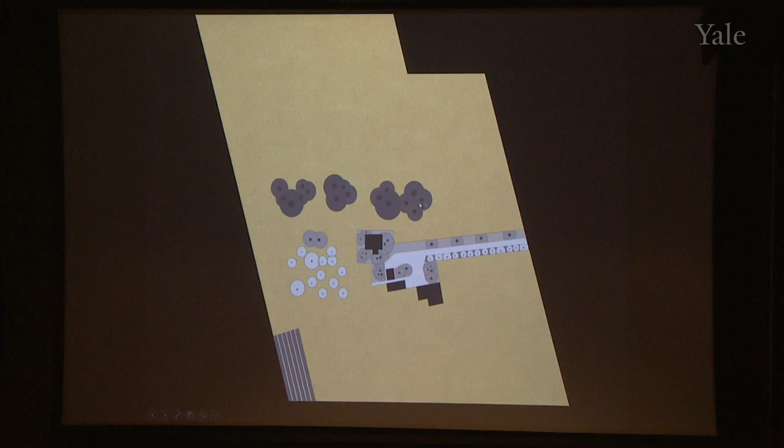Okay, these are fully mature Douglas fir trees, which are a residual part of the evergreen forest that used to cover the island. Below, there is a cottage, barn, a few outbuildings, including a studio, and a cultural landscape, which has been constructed by a German resident who subsequently sold the property to my clients, which is characterized by fruit trees, by trees imported from Europe, by a very eclectic cultural landscape.

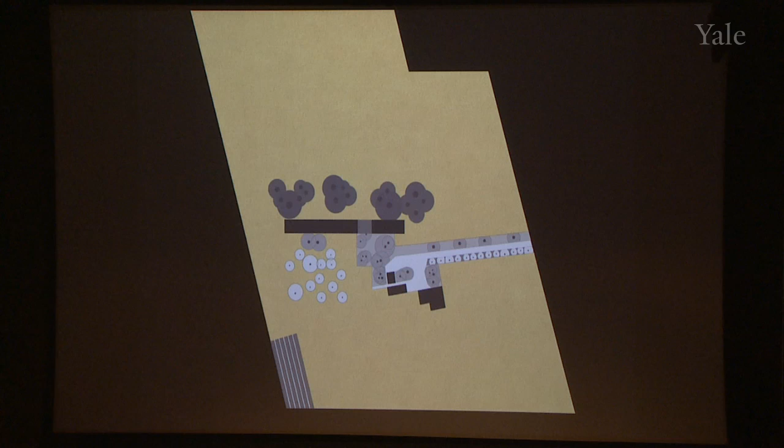So our approach was to try and find some way of organizing this larger site and introducing a larger new house to the project. And we did that by, first of all, taking the existing house and selling it to the neighbor up the road and just moved it down the road, and then inserted the new house, which is comprised of 2 parts, a main house and a guest house, and it has a very unusual proportion. It's 280 feet long, and the interior dimension is 16 feet. So the aspect ratio of this house is extreme.

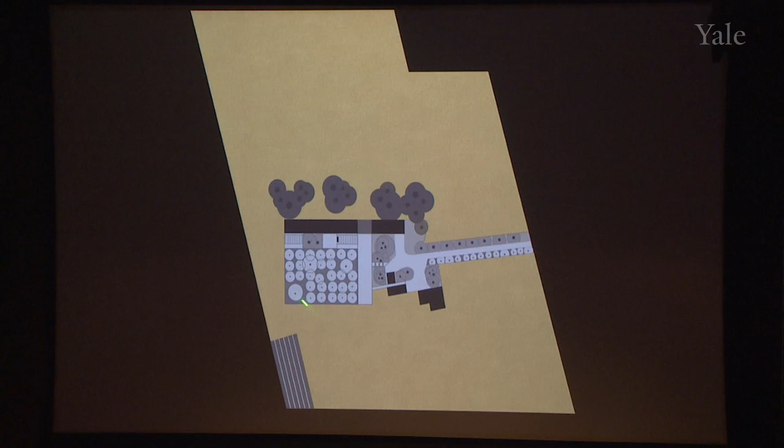And then finally, we reinforced the cultural landscape by developing the orchard in a much more intensive way. The clients were very food-oriented and very garden-oriented, and so there was this significant program of reinforcing the cultural program. Here you see the plan in various forms, the roof plan, the reflected ceiling plan, and the floor plan. And a couple of things that jump out. One is obviously the aspect ratio, this extremely elongated plan where the rooms are simply lined up as a series of rooms.

But if you look at the roof plan, you can see that there are 40 skylights in the roof. And the majority of these skylights do not penetrate into the interior. They simply illuminate the building envelope, the roof assembly of this house. And I'll explain briefly why that is so. And then there are very significant apertures which are completely opening. So this is an aperture that's 78 feet clear span, which is fully retractable. The climate here is extremely benign. During the summertime, the temperatures run in the mid to high 70s all the time. There's virtually no rain. And so the house opens up like a pavilion.

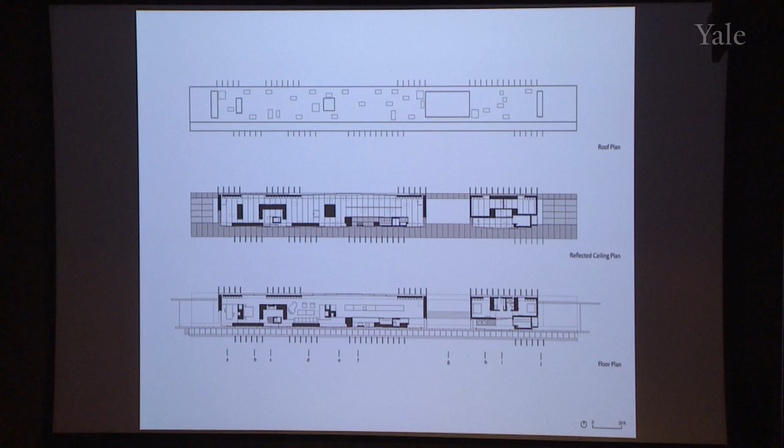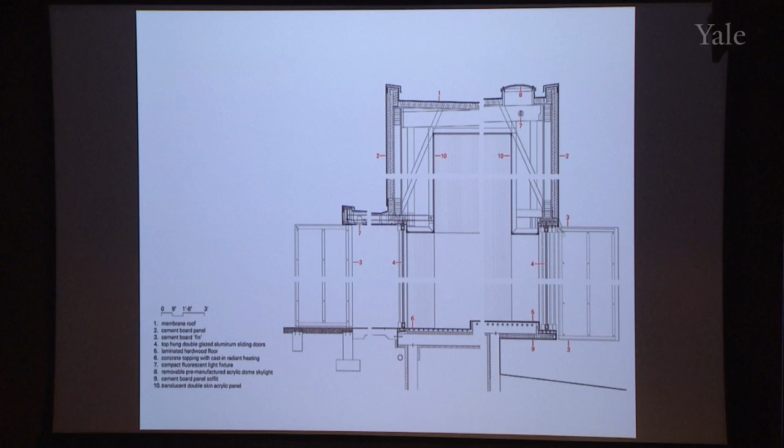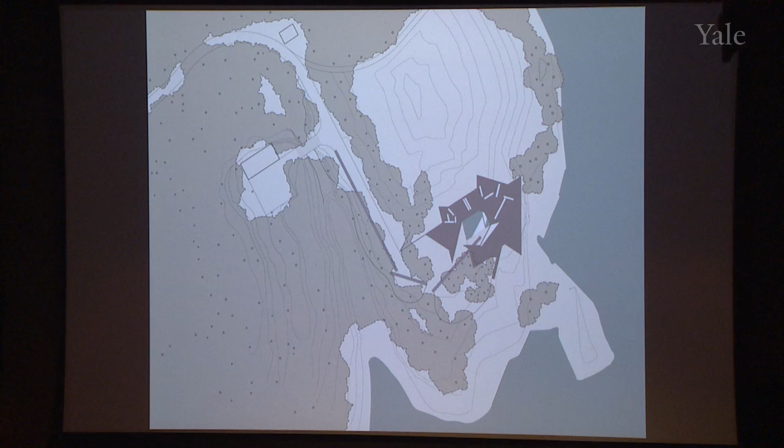And so the spatial idea of the house begins with the mound and the forest and the panorama to the east. Entering the site from deep inland, you move along the edge of the rock outcropping and through a series of spaces which are defined by low rock walls. And then there is inserted a series of concrete walls which channel the space through what will be the house and out to the ocean.

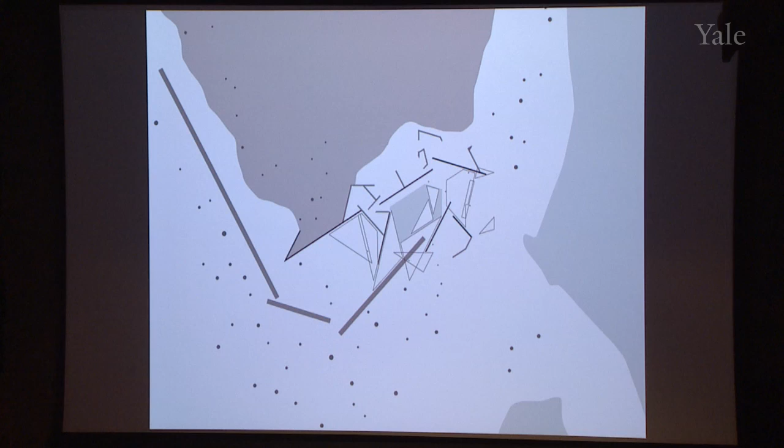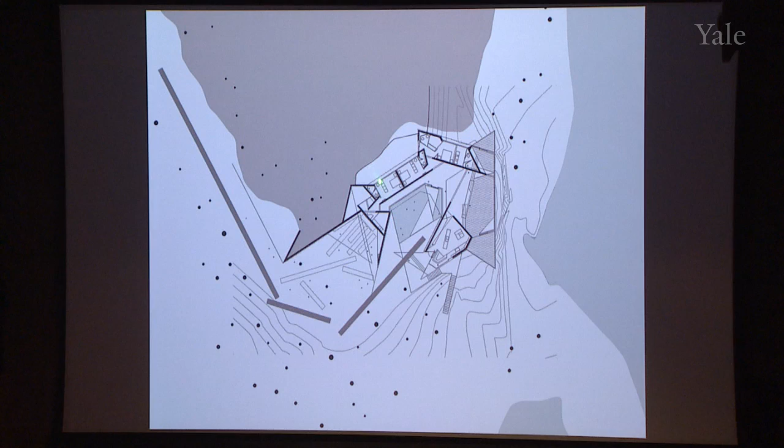Various eddy-like spaces which are around the main flow space become the service spaces, bedrooms and kitchen and things of that nature. That center space gets filled with debris, like the debris on the beach below, shards of concrete, patches of water, elements of furniture. And finally, a deck which is cantilevered off the rock cliff beyond the face of the rock toward the ocean, and the plan itself. And so the private rooms are all located around this central space which flows through.

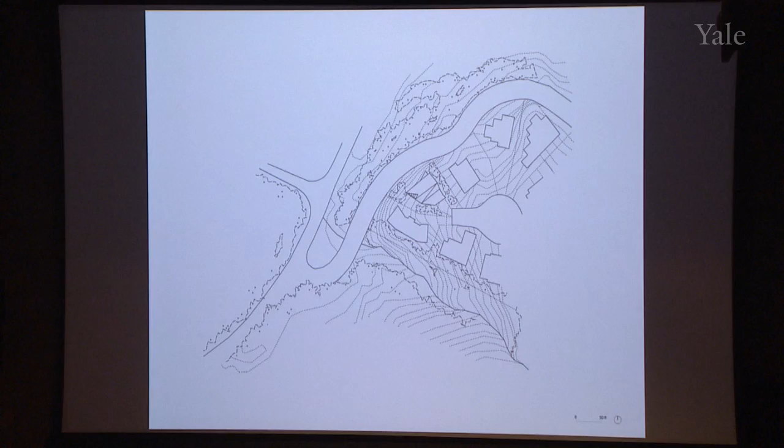Very tough context for us by virtue of the character of the adjacent dwellings, but also by virtue of the real estate imperative of Whistler, which is that land prices are very high, and the owner wanted to maximize the development. And so our instruction was very simple. He wanted the biggest house that was legally possible to achieve on the property.

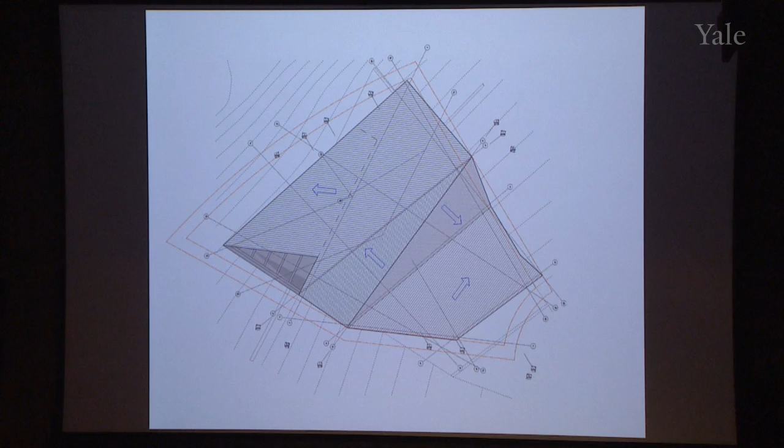That posed the obvious issues of fitting it into the building envelope, but more challenging in Whistler is the need to design a house which sheds snow into locations where people and cars are not located. And so the roof is designed in a way to push snow around so that it doesn't go into the areas where people and their vehicles are.

This was, from a design point of view, a new investigation for us. It was the completely three-dimensional project. The second house I showed you on Quadra Island has a very complex plan geometry, but beyond that, it's fairly conventional. This house was developed to maximize volume. We designed it entirely in small card models.

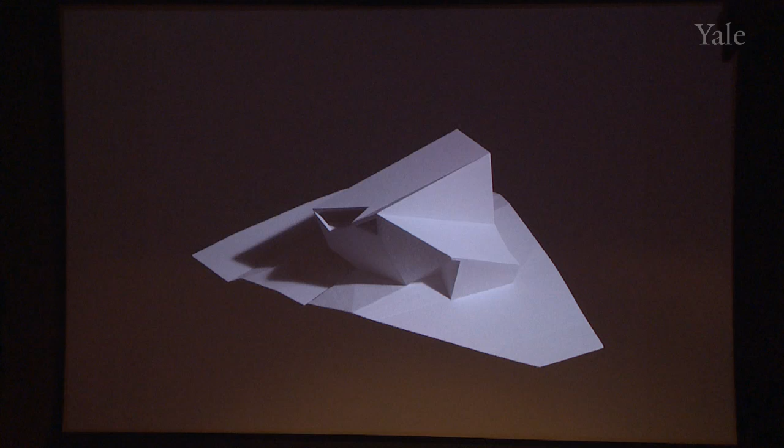And once we were satisfied that it was a good match, we proceeded with that. And so this is the final digital model of the project. Except for some interior walls, there are no vertical walls in the project. And aside from the floors, and even some of them are sloping, there are no horizontal surfaces in the project. And so framing this project and documenting it became a significant challenge.

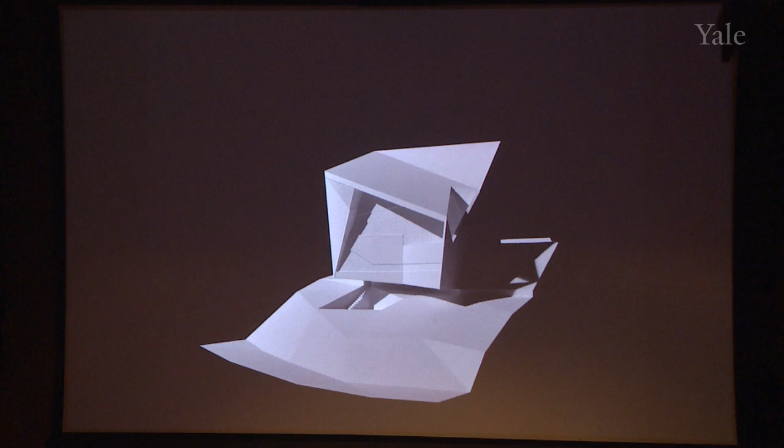It was only possible because of our ability to work in 3D and the ability of certain trades to construct in 3D. And in that regard, the house was framed in terms of its principal members with steel and heavy timber construction, both of which industries are probably the most developed in terms of three-dimensional geometry. And so they were able to sort of stitch out the basic configuration of the house within which there was a wood structure infill.

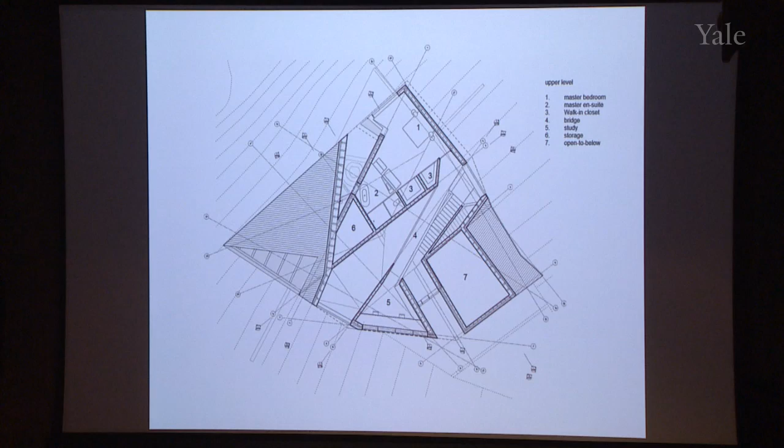We made a few mistakes where we felt that we didn't need heavy timber or steel. We framed those areas in conventional wood framing, and getting those geometries right was almost impossible. The contractor really struggled. We came to understand that it would have been a much better investment to do the entire project as a steel or combination steel and glulam frame to simplify the construction process.

And so the house is constructed with a concrete box which allows a significant cantilever out over the slope because it's on a steeply sloping site, above which there is a frame which creates the upper structure with a wood infill, and within the middle of which is a tall roof space which runs through the project to bring light into the center of the project.

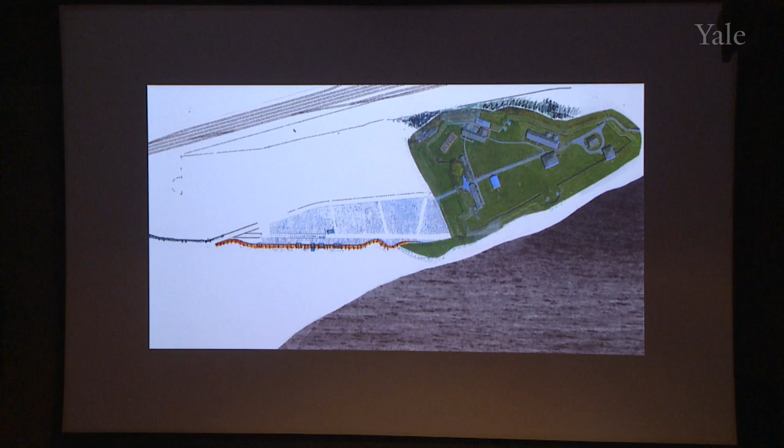And so here is our site, not the most auspicious of sites. And this is the beginning of one of the sketches from the competition, the idea of a barricade, a long palisade of weathering steel panels behind which and below grade, below the common above, the visitor center would be located. And so the plan is, this is the pathway of the freeway, which is running through here. The building is located in the zone between the freeway and the undisturbed soil above.

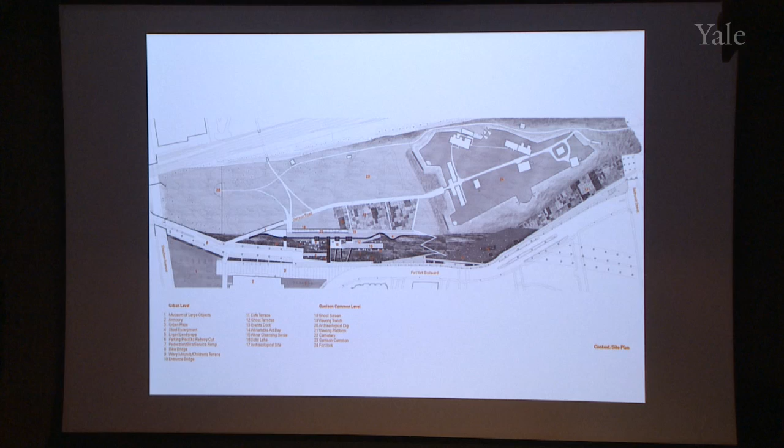The undisturbed soil above is an archaeological site which is being worked. And the only place in which we could locate the building without interfering with the archaeological site was in the spoil of the freeway construction. So basically that part of the site that was disturbed by the construction of the freeway is where we located the building. The building, as I said, is basically subterranean, located below the common. So this is the battlefield here. This is the freeway. This is the extension of the common with our weathering steel wall.

And then the space below the freeway is part of a very important series of spaces in Toronto right now, which is the subject of a great deal of discussion because this freeway cuts off the lakeshore from the city and has significant spaces under it. And so one of the important things that the project began to address is how to occupy this space and turn it into a positive public space.

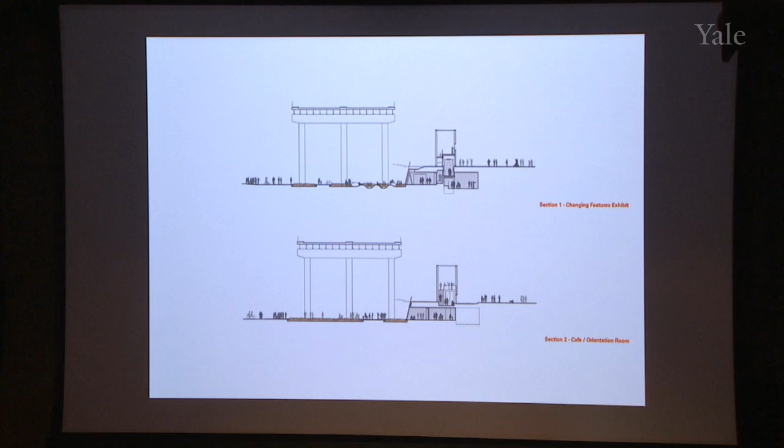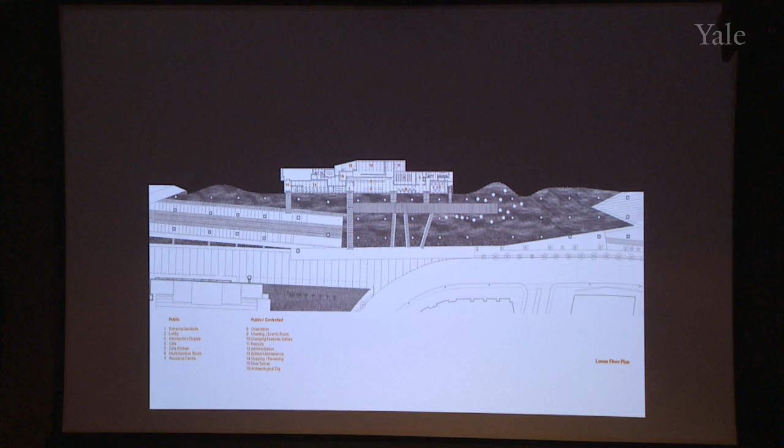The plan, which I won't go into in detail, has a major lobby. It has a variety of multi-purpose rooms. Not only is it a visitor center for the fort, it is also a community center for the local population. And so it has a lot of multi-purpose uses. But there is also an important exhibit space, to extreme gallery standards, which is located here, and an administration area for the operation of the fort.

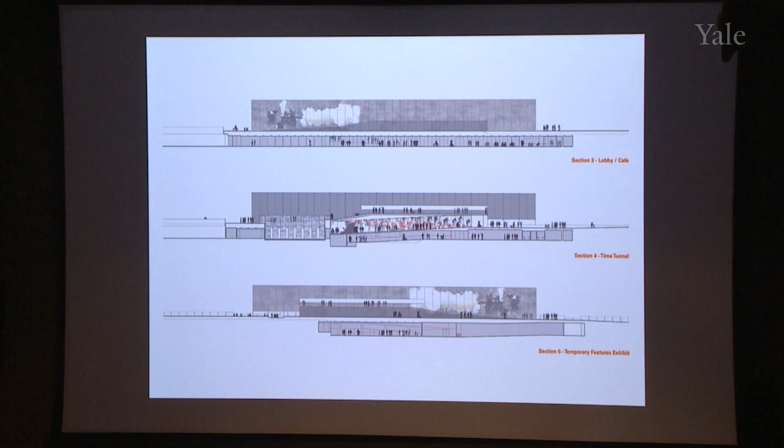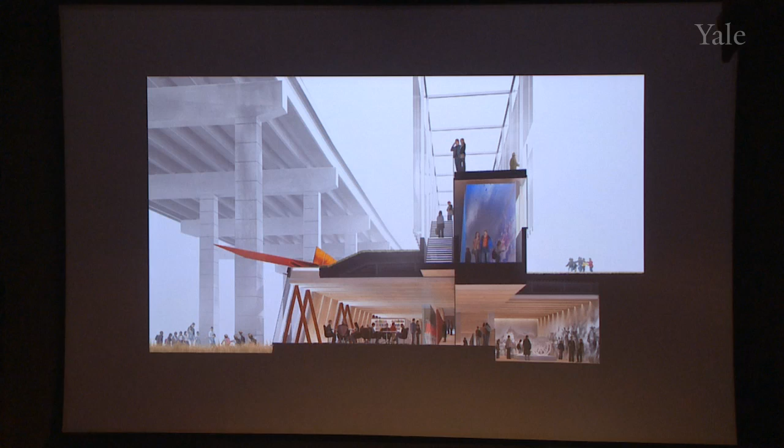One of the interesting things about the brief of the competition was that there was to be what was described as a time tunnel, which would lead you from the visitor center to the fort. And in our project, we proposed to develop a ramp that would run through an audiovisual experience and take you from the lower level within the visitor center up to the upper level of the common, which you see here. So taking you up and out to the upper level, again in section here.

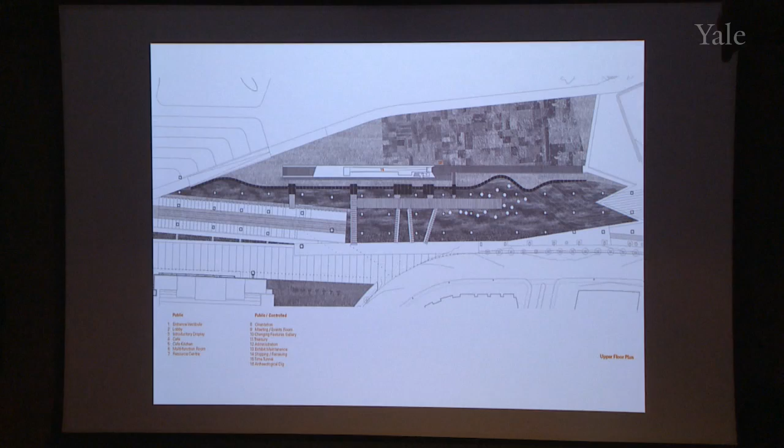What we found was that there was another possibility, which was that this would become a scrim onto which audiovisual could be projected to represent events of the history of the fort, but also to support other public events. Well, we won the competition. Actually, this is the plan leading you up and back to the fort. And the project was delayed for a while, and then ultimately we began to develop it.

year. The scrim and projection is a victim of the budget struggles that we had on the project, and even the fact that the project is currently incomplete in terms of the landscape and the interior development is a function of some of the budget struggles we had. But Toronto was blessed by the presence of Rob Ford as mayor, and this project was developed entirely during his tenure. And so it was an interesting experience.

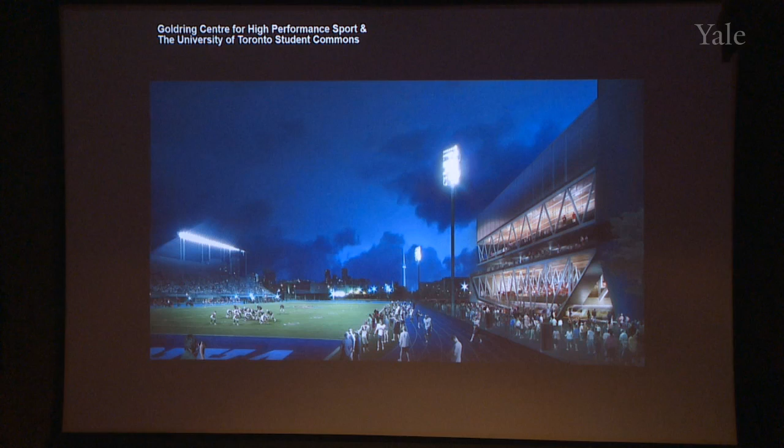There would be a large basketball, volleyball field house, which would have 2 courts, one of which is a competition court and practice court, the other strictly a practice court. This would be an extending stands, which would cover the practice court during events, and so there would be seating on both sides of this court, and there would be a clear span over this entire area. The university also wanted to put a tower on top of the field house.

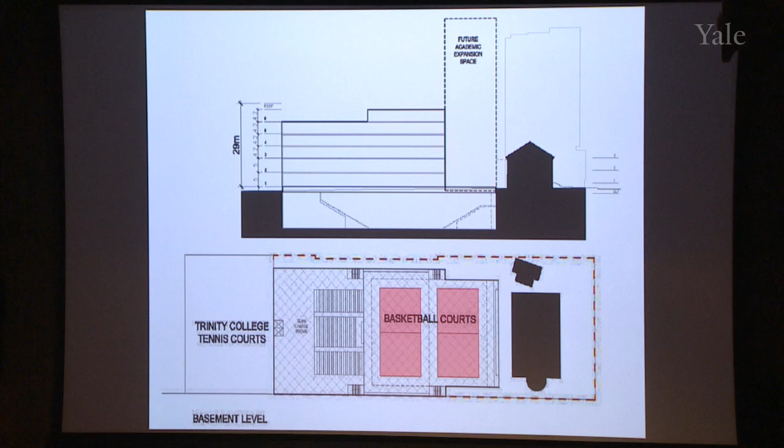And in our proposal, we decided that that was a structurally ambitious thing that we could avoid. And we decided to avoid it by organizing the field house differently. We decided that we would use modern technology in the form of LED game lines to reorganize the court in such a way that you could have both the competition court and the two practice courts within the same space and avoid the need to project beyond the site of the project to below the tower. And then above that, we located the student center, the strength and conditioning center, and then a small research hub above that.

As I said, the competition court looks like this with seating all around, and it's very interesting because we did this. Ultimately, we were selected for the project, even though it was in violation of the rules of the project, which is the perversity of competitions. More likely than not, the winner has broken a rule, an important rule somewhere.

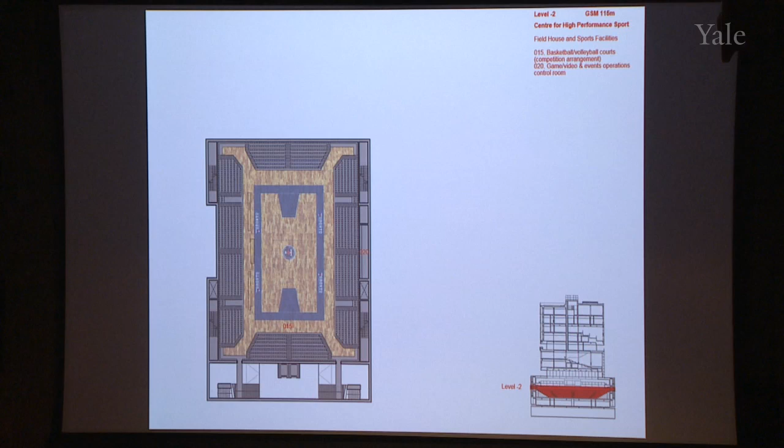So the notion is that you would enter the sports facilities from a lobby on the south and the student center from a lobby on the north. This is the 360 seating, which proved to be instrumental in the organization and selection of our project.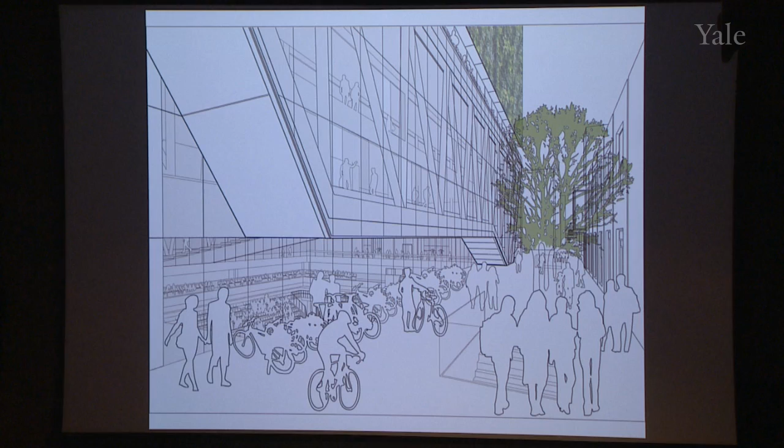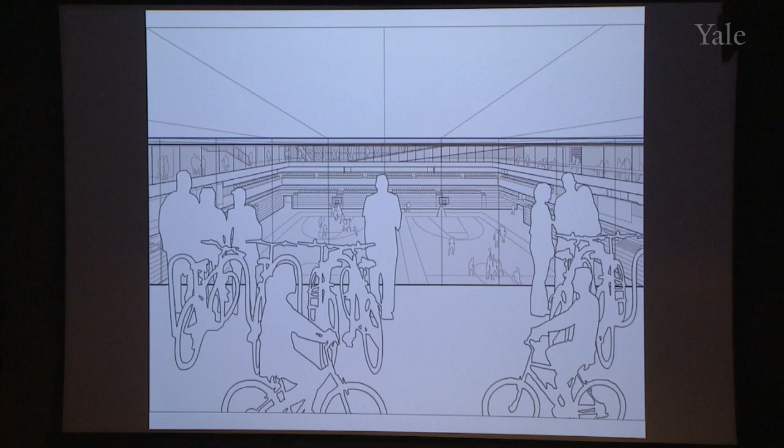Not only that, unlike the university brief, we raised the gymnasium so that there is clerestory lighting all the way around, which can be blacked out, but which allows you, from the student lane and from the street and from the two lobbies on either end, to overlook the basketball court. And it's really quite amazing. The lane is only about 20 feet wide, and you look into this enormous space. It's a real inversion of expectation.

And so going to the student center, moving up on the north lobby to the student center, interestingly enough, the students who were not really part of the selection process or part of the mandate for this project ultimately decided that they didn't want to be part of the project. And so when we moved forward, and this is the Strength and Conditioning Center, again, overlooking the field. When we moved forward, they said there's no way they wanted to be in a multi-purpose university building, because inevitably the university would take over their space, and they wanted to be in a standalone.

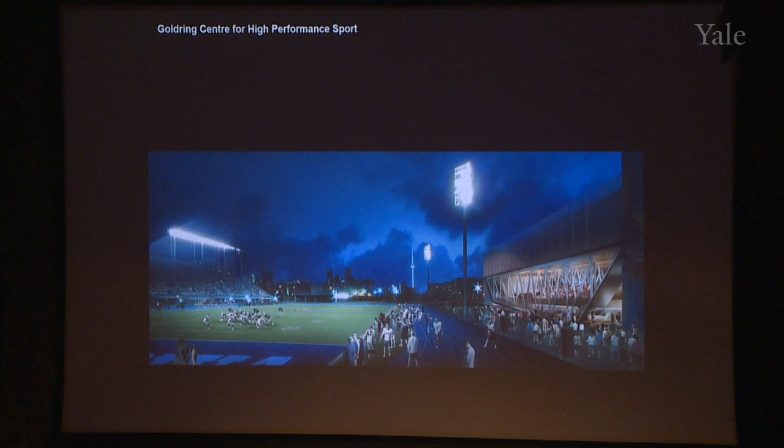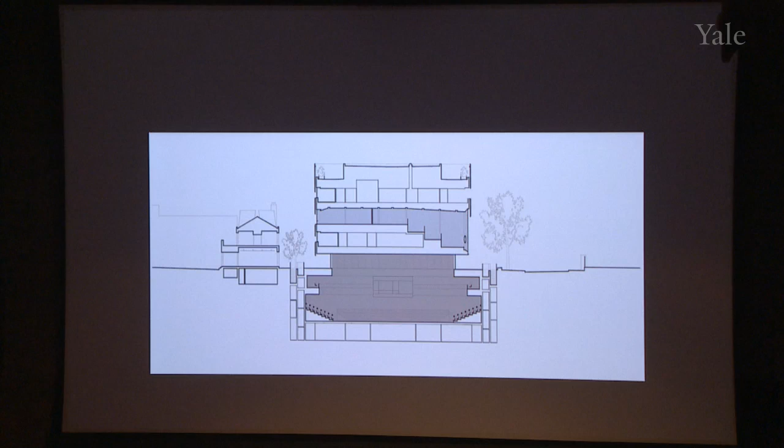And as a result of some significant budget issues, we removed that part of the project. We really consolidated the research into a single floor, and so we were able to get a much more compact and much more cost-effective structure, which allowed us to move forward with the project, except for the wrinkle that the tower, which was supposed to be here, which we had so carefully avoided, was compromised by the redevelopment of a historical building at this point for a very important donor for the university.

To make this building work, like Rudolph Hall, they needed to add exit, access, and mechanical to the building, which they decided to do in this location, overlapping the footprint of the proposed tower. The argument that they made was that these components could be treated as temporary, and that at some future date when the tower went forward, they can be removed. How you remove the elevator system, the mechanical system, and the safety exiting from a building was something that was not discussed and obviously not practical.

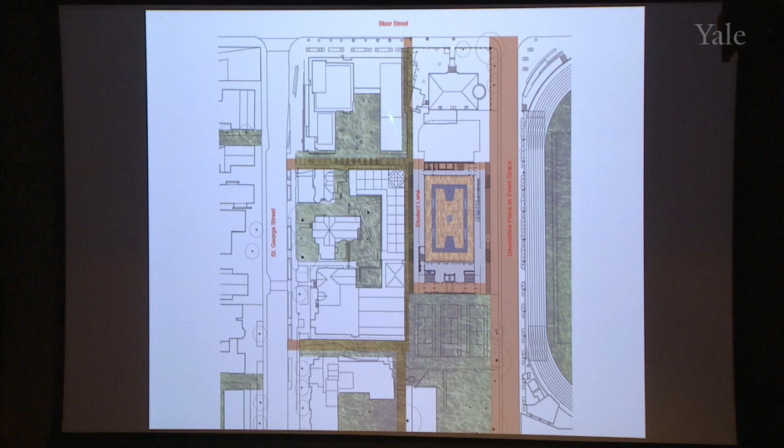And so we were then charged with how do you now solve the problem of the tower? And not only that, the tower was held away so that trucks could get in here to provide service to these four buildings. And there was only one solution possible, which was to construct a turntable, and trucks drive in and they get turned around to deal with all the servicing from these various buildings. And not only that, this turntable structure had to be designed in such a way that it could support a tower of some undescribed

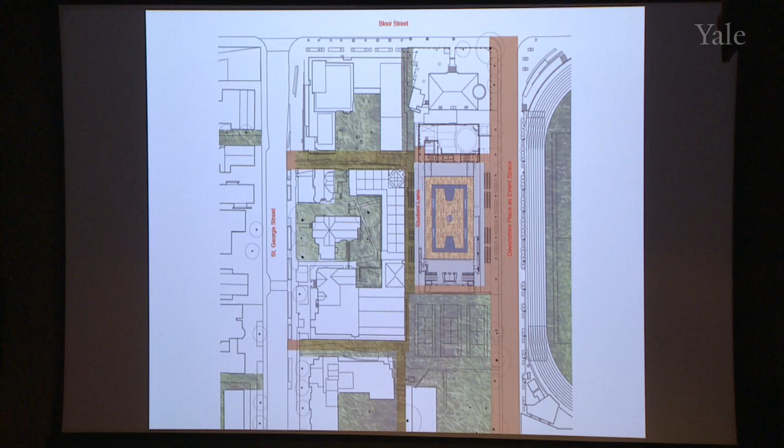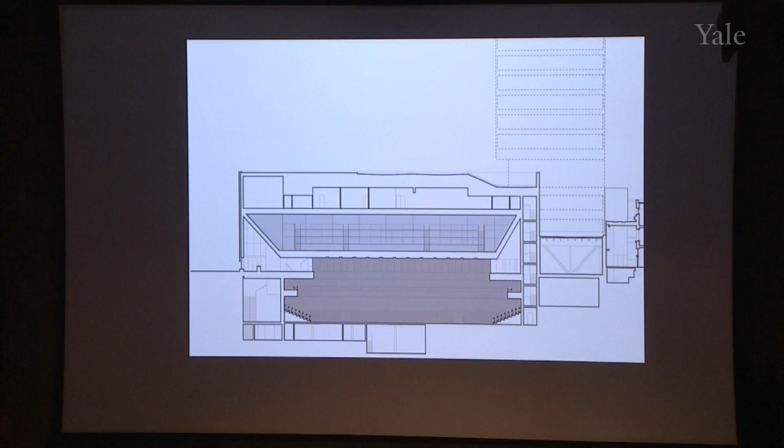future character. And so the building that we were asked to design now had a little doghouse on the back of it, which had to set itself up to support a future tower. And not only that, the future tower sat on part of the large span trusses for the field house. And so here is the project under construction.

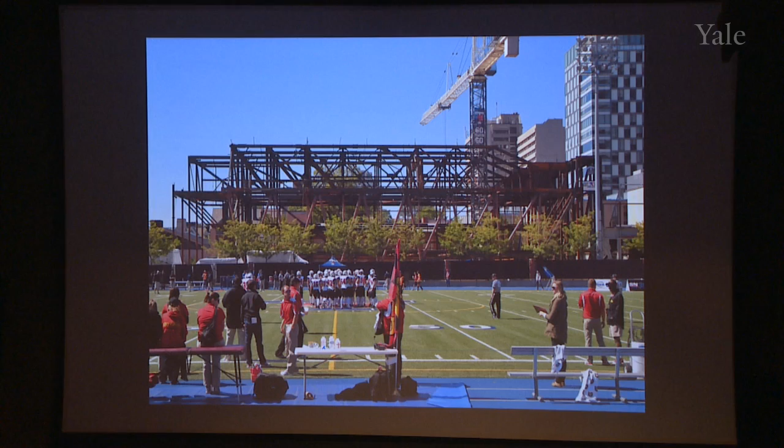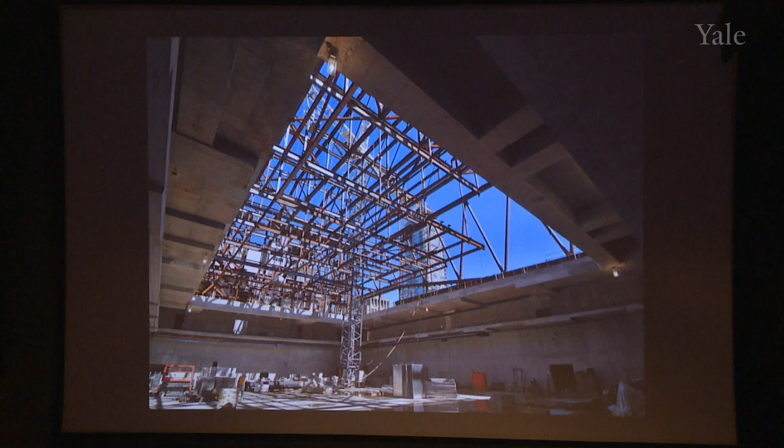In order to deal with the clear span of the spaces below, the building is actually hung from a bridge above. And so under construction, this is the field house, and here you see all of the floors above the field house, which are just levitating above the space, being hung from these enormous trusses, which ultimately, and which we're now commissioned to do, we will construct a tower on top of.

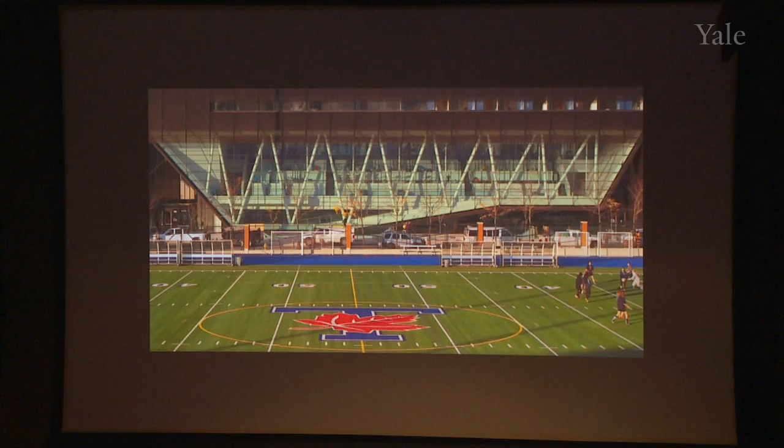And so here is the project across from Varsity Field. This is the Sports and Conditioning Center, which you see here. It's just opened, and so we were lucky to get in and get a few photographs of the project.

And here you are overlooking the field house. Okay, so part two.

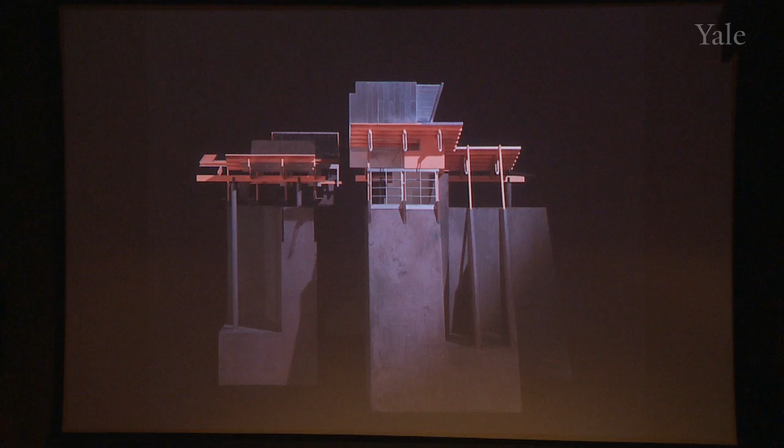I should say that our office has always been engaged in architectural research. In the olden days, when Tim was in our office, the research that we took on had to do with formal analysis. And so we would build models like this one, which Tim directed, and this one, which Tim and I designed together, which were fragments of projects that we designed with the intention that they would be developed in such a way that they would bring forward the formal characteristics of those projects in an exaggerated and perhaps more legible manner.

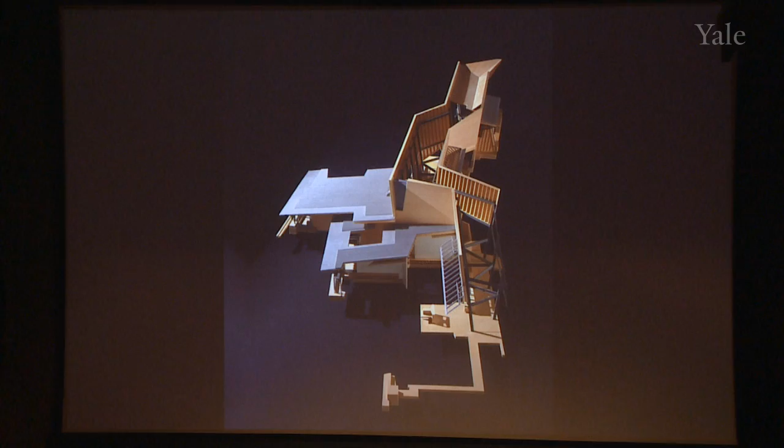Since that time, and actually coincident with my teaching at Yale, we have radically transformed the research that we've been doing. What we now are doing is full-scale material-based research, which looks at the effects of material manipulation in terms of developing spaces and structures. And so the first is a project which we were invited to participate in, which was to provide some shelters on a frozen river in Winnipeg, which is the city in which I grew up, that would be merely wind protection for the extreme climate.

And so we moved immediately to full size, and we found, to our surprise, that even the thinnest of plywood didn't do what the model had suggested that it would do. The thinnest of plywood had very little ability to bend, partly because it's essentially an isotropic material that is equally strong in both directions, and it wasn't large enough to construct the volumes that we were attempting to make. And so we ultimately sourced a material called bendy ply.

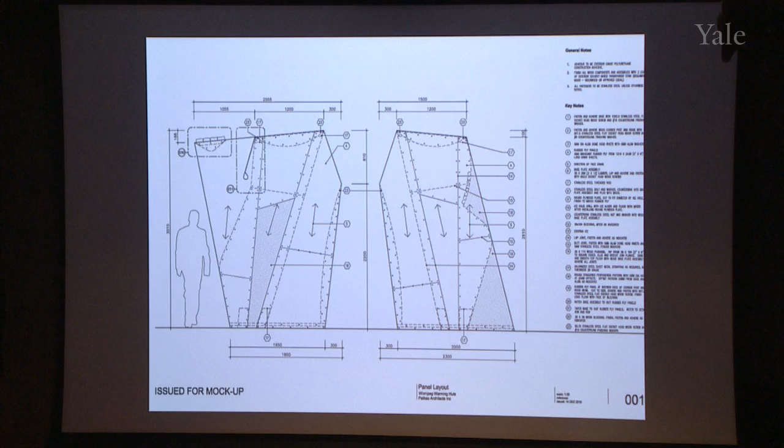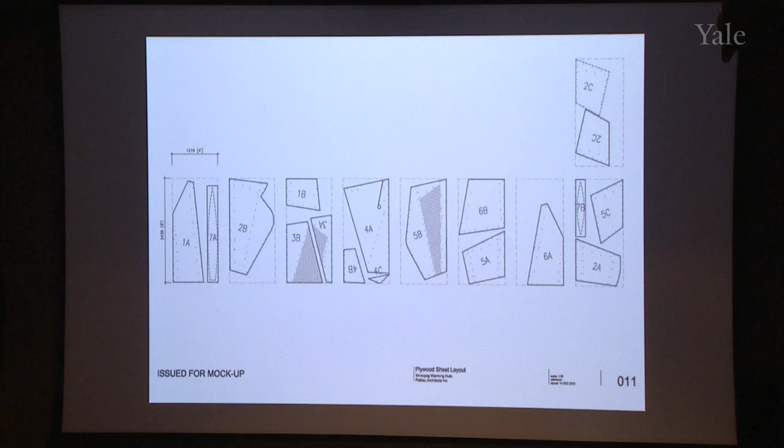Even all of the connections: this is the base, which is a timber base. This is the back spine and the roof spine, which tie these sheets together. These are the pieces that go together to form these elements. Unpredictable shapes, because they were simply cut to achieve the volumes that we wanted to create and then opened up. And we even studied, now going back into model form, the notion of how these might be clustered. And so we have the cluster and then the fabrication.

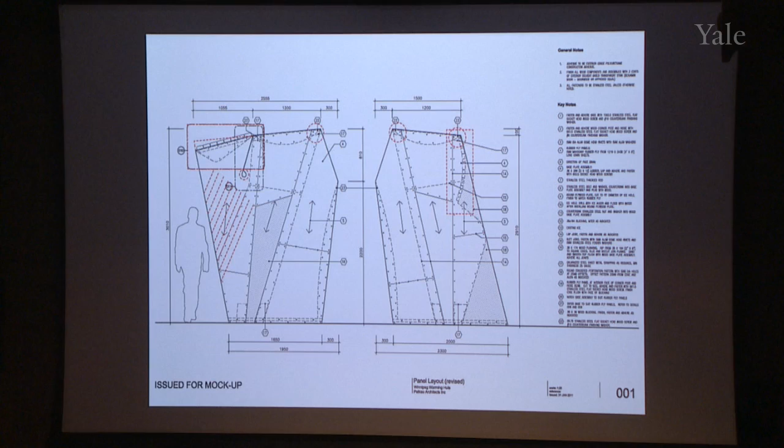The net result of all of that was that we got it built, and in some ways the added thickness made it increasingly more robust. And so here it is out on the river. These photographs were taken by a very dear friend of mine who has done most of our photography, and it was 35 below when he was shooting this.

And he was trained by Ansel Adams as a landscape photographer. And so it's all tripod work and everything, you wait for the perfect light. And so he was out in the field at 35 below, sitting behind his tripod doing these things. Well, that didn't last too long. Very shortly into the adventure, he threw the tripod away and became the most hated of photographers in his lexicon, the go-go photographer who points and shoots.

And nevertheless, he was able to point and shoot quite a number of beautiful photographs for us. And not only that, he hung around to wait to get the key shot, which is at 40 below in the evening, which was well worth the wait.

Well, this work was all taking place during the second term that I was teaching here, and I was teaching a studio which was located at the Eli Whitney Workshop and Museum just north of New Haven. And the director of the museum, William Brown, said to me, you know, have you seen this video called Between the Folds? It's all about origami. He said, I really recommend that you see it. And I said, oh, okay. I had never really thought about origami. The idea of folded birds had not interested me.

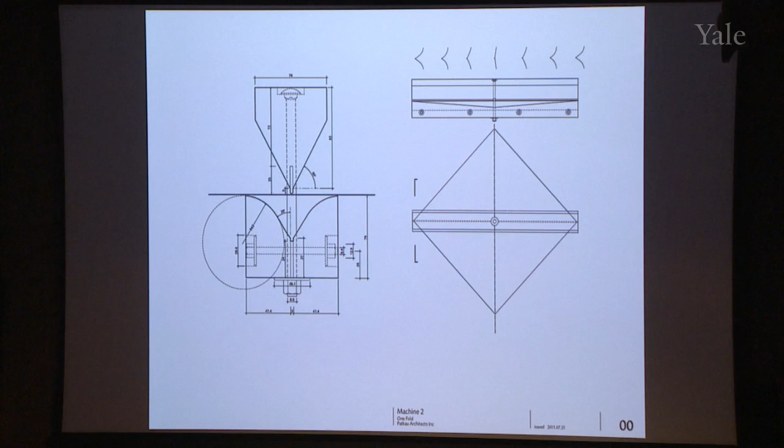And so I had two really, really talented young guys in my office who helped me with this, and we began to invent machines that would bend steel like origami. And so ultimately we made 6 machines. We started out with, this is machine number 2. It's a very small machine. We were still bending flashing metal at this point. And here you see some of the process where we bent the metal.

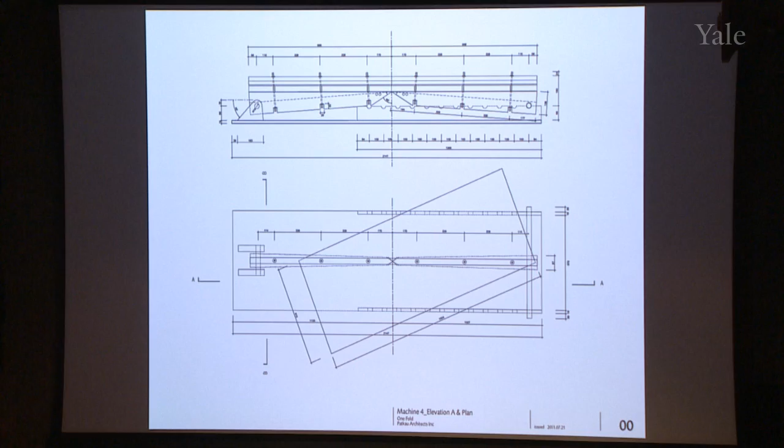We went through 6 machines. This was 2 people's work for 4 months. The research is not a modest endeavor. And ultimately came to this machine, number 6. And here you see it almost consumes the entire studio, or courtyard outside of our studio. This is a 5 by 12 foot sized 16 gauge, 18 gauge sheet of stainless steel.

So it's a very big piece of steel. We have a machine that's big enough for it, and we began to bend it. And the trick about our machine is that it's broken in the middle. And so as we start tightening the bolts, which drives the 2 pieces of wood together, if we had a shop, it wouldn't be bolted, it would be a hydraulic press, but we didn't have that.

But as we do that, we raise it, and the break itself tapers from a deep break to no break at the center. So there's really no depth where this fold is. The metal is still flat there. And that's the secret to this. By folding it more here and virtually not at all there, and by bending it as we're raising it and tightening it, we're able to get this form, which is this.

And these curves are completely natural curves that spring from the bending operation of this metal. And so this was a different material and a different technique, but the same operation as in the skating shelters, which is basically sprung form, where the material itself takes on the curvature that it wants to take on as a result of the forces that are applied to it.

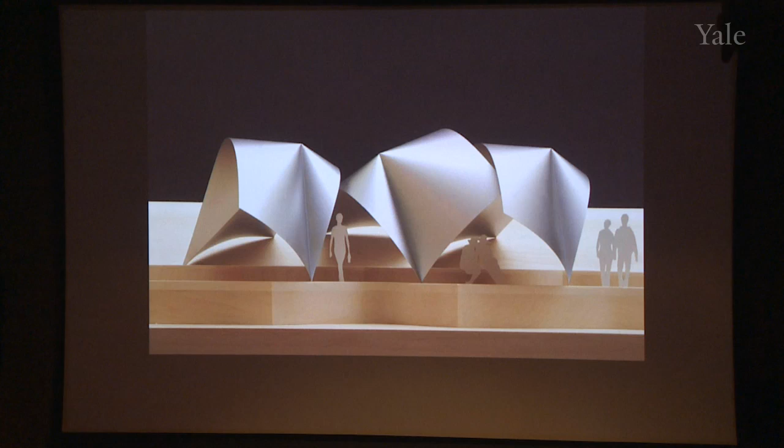And then we projected this project, which was where we took the 5 by 12 sheet and applied the same forces to a 24 by 10 sheet, so 100% larger, and you get this. And it's actually a very robust structure, because not only is it a broken angle, it's got the arch shapes as well. So it's very, very stiff and a surprisingly powerful natural form.

Shortly after finishing that work and being quite excited about the result, we got a call from Comme des Garçons, from this person, Rei Kawakubo. And Rei is a famous fashion designer. Here she is with the dark glasses and the whole 9 yards. A very extreme fashion designer who is always on the edge, who owns Comme des Garçons.

There are a variety of outlets, and she said that she was opening a new store in Ginza in Tokyo, and she loved the skating shelters, and she wanted us to build some things that she could use for display or for change rooms or something in her new store in Ginza. And we said, okay. And she said one thing: it has to be fireproof, because in Tokyo, fire is a huge issue. And so we said, no problem, because we are steel masters.

And so we developed this scheme, which is basically taking 2 of our one folds and tying them together to form this structure, which would act either as a display structure or as a change room with a suitable modesty curtain. She said she didn't like it. And she said she didn't like it because it was too artistic. And I thought, how can something be too artistic? But what can I say?

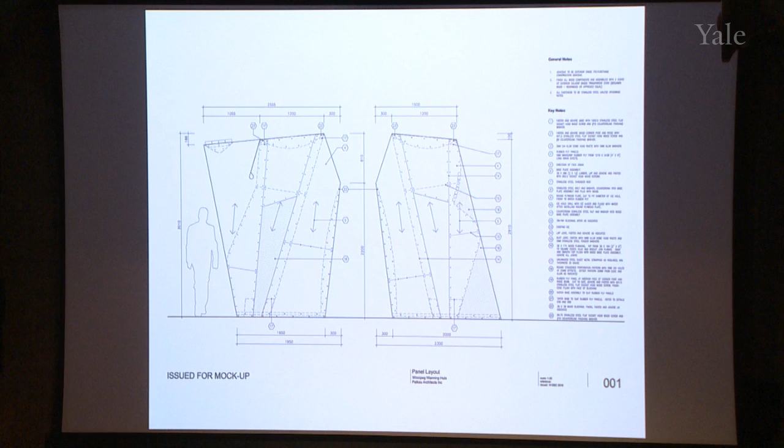And so we looked at how we had accomplished this, measuring from the full-scale wood. What we decided to do was to measure from the tiny scale plastic and develop forms. And here you see the patterns that we developed off of those tiny plastic models. And you can see that the patterns are beginning to become increasingly fluid. They're becoming more like clothing and less like architecture.

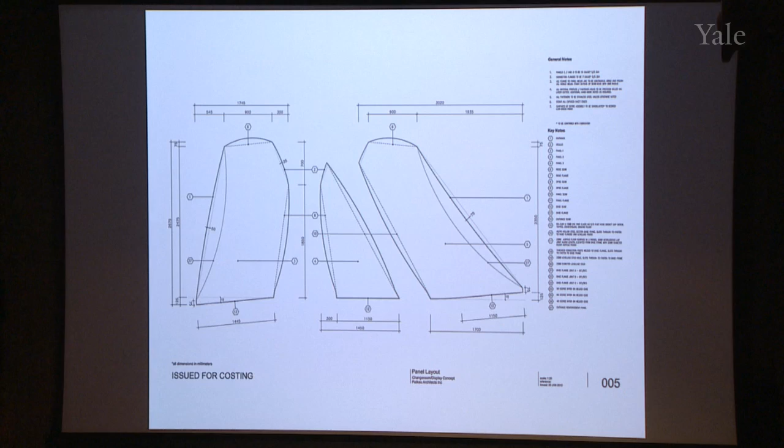In fact, these are the fold lines, where this piece is tied to that piece. And so it goes together very much like clothing, like seams. And the formal language, which again is something that we take off the model, and we develop with all the bits and pieces that we learned about doing the wood one to make them out of steel.

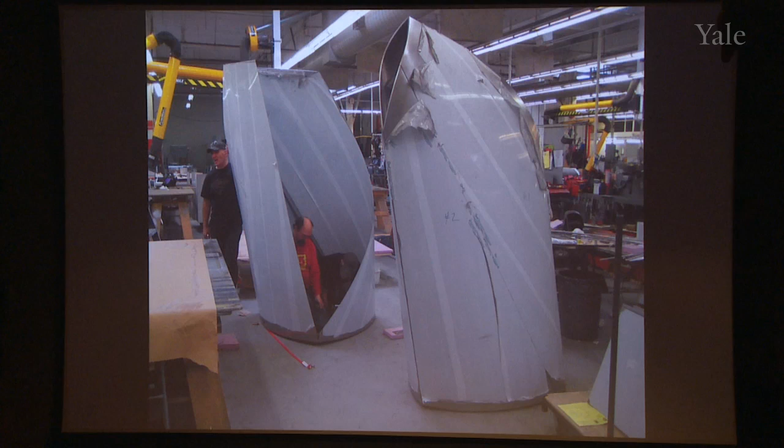And so our commission was to design and fabricate and deliver these from Vancouver to Tokyo. And so here they are being fabricated in Vancouver. We were lucky to get a great group of people who were really interested in this, and we began building these things in the shop. There were some interesting adventures en route. Many of the details that we developed worked out perfectly, some of them not so much.

The first problem was we knew that there would need to be some attention paid to the edge because it was quite thin, and we were concerned not only about the ability of somebody to cut themselves on the edge, but also what we learned in this process was that in these very, very thin steel shells, the edge, and I think this is true in all shells, the edge is where the power of the shell structure comes to an end. And in a sense, the weakest point in a shell is the edge. And so typically what we found was you had to reinforce the edge.

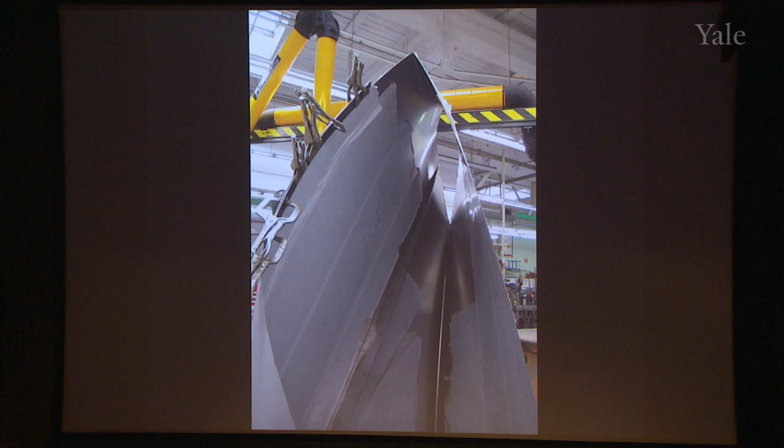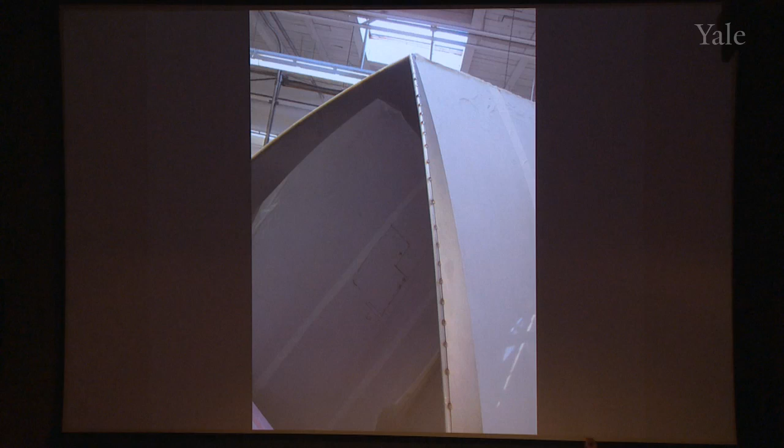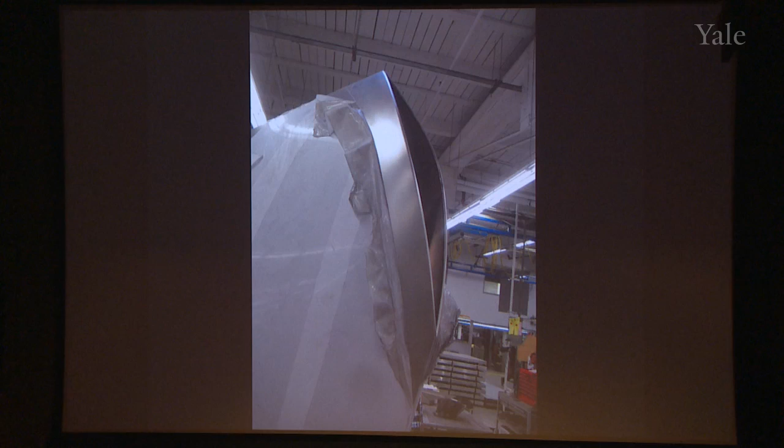And so the notion was that we'd take a simple band of plate and attach it to the edge, and that would accomplish the job. What we quickly came to understand was this thing is constantly twisting in space. And so a flat bar could not do that. And we were perplexed until the simple idea of attaching a rod to this edge. So we tacked on a 1/2-inch steel rod, and then we ground it out. And this is the edge condition that we got, which was quite amazing because it takes this unbelievably thin sheet and gives it this soft, very sensuous edge condition, which you see here.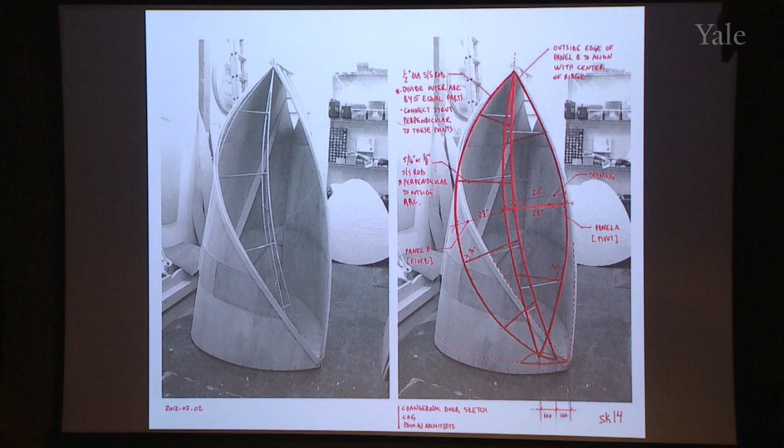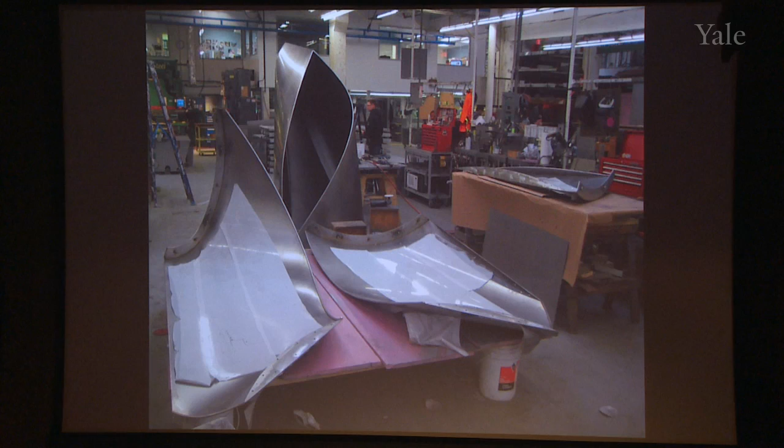And so we had to put it all together, but not only that, because it was going into a shop in Tokyo which didn't have access from a service elevator, we had to take it apart on the street in Tokyo, carry it up in little pieces up the stair, and reassemble it in the shop. And so one of the problems was that the pieces that we had made were bigger than the stairway that we could carry it up in Tokyo. And so how do you break it down? So here it is, broken down in pieces, and the secret to that is this right here.

What we found was that there was one place where there was a straight line on the face of the curving plane. And at that point, we made a cut and we made a fold, and then we could make a joint. And so we could break that large piece down into two pieces. And that ability of that straight line, that ruled surface, became very instrumental in subsequent projects. And so I'm just going to blow through these things, but it was quite a little piece of industrial design.

And the end result is remarkably monumental, sort of enigmatic form. And not only does it have a monumental appearance, it has an unbelievably robust surface. Even though it's very thin material, the curve shape and the edge conditions turn it into a very, very tough thing. And here it is in the shop.

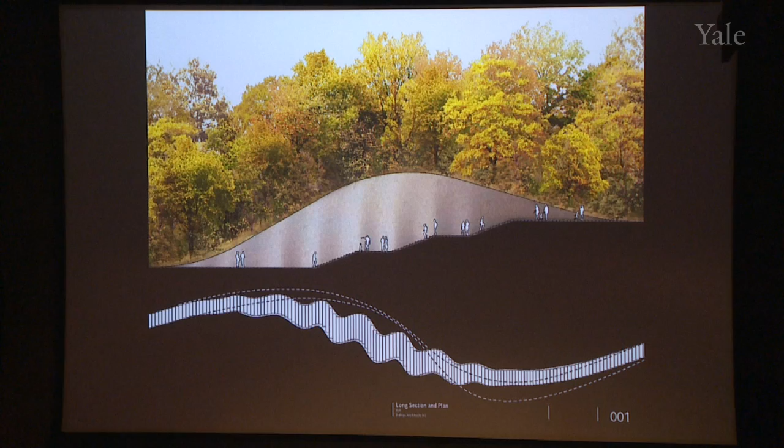So moving from the notion of that to our real objective, which is to make these research projects architectural in scale, to get them big, we began to look at the whole notion of ruled surfaces and what that could develop. And so as a hypothetical project, we developed the notion that we would design two retaining walls which would construct a cut through the landscape, joining two pieces of parkland that was separated by topography and vegetation. And what we did was we decided that the configuration of these retaining walls would be undulating intensely at the bottom of the wall and undulating in a very gentle curve at the top of the wall, so that we would have an inherent structural strength through the shape.

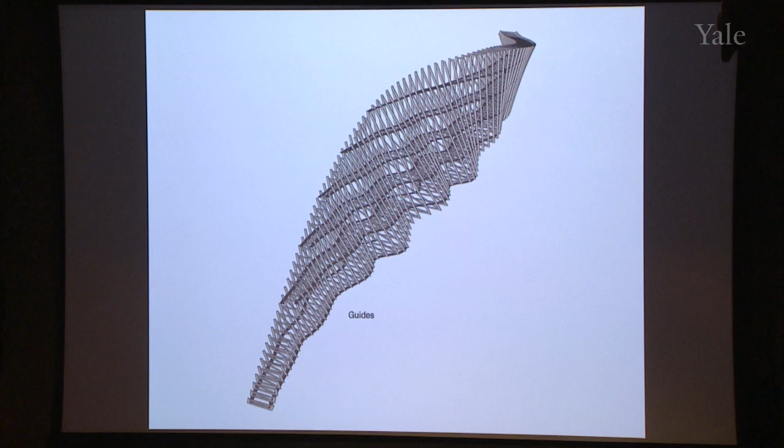And the idea was that we would make a series of triangular trusses, which here you see them all lined up, and each one is just a triangle with some cross framing between. And onto those trusses we would make some CNC cut guides, onto which we would lay in a whole series of 2x4s. And these 2x4s would simply be sitting in the guides, and onto that we would add reinforcement and gunite.

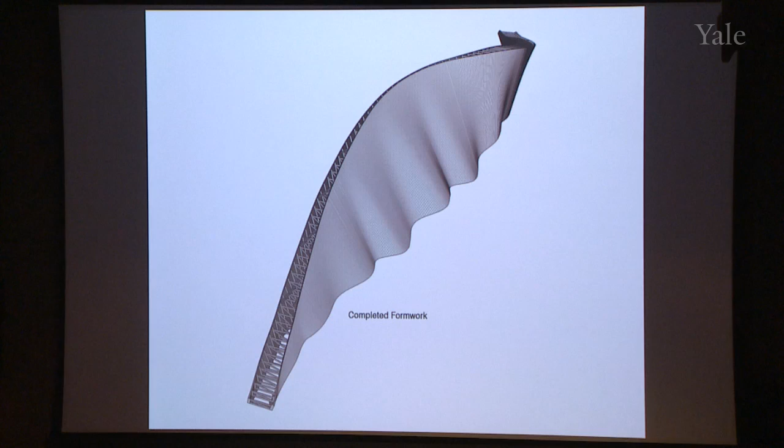And so we would form basically a swimming pool type structure on this, and then simply remove the wood structure from the interior, and these are the spaces and the robust structure that results from the undulating geometry and the single-sided formwork, which acts to construct this space, and shows sort of the power of simply taking dimensional lumber at a large scale and using it through a very simple mechanism like a ruled surface.

Having done that, we then said, well, how do we start scaling up the metal that we're working on? We had taken our machine and gone to fabricators, and they've always resisted using our machine because they don't believe that they can predict and control the outcome. And so we decided to go back to a much more rudimentary idea, which is that you simply fold steel in a conventional brake, so that any of these forms can be made in any shop simply by folding pieces of steel and joining them together.

And using this idea, we could then start stacking them, which you can see over here, and construct tower-like forms. And the notion was that we would then construct something, and we said, well, let's call it cooling station. The idea was that there was a foundation which was isolated from the ground so that it was the earth temperature. There was a reflective stainless steel tower, which is painted black at the top and grading to reflective at the bottom. We would then have some thermal sink embedded in a double layer at the top.

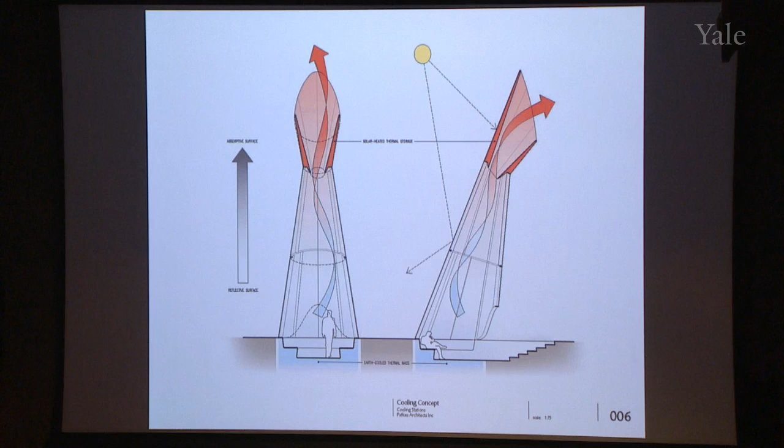And so the combination of the radiant cooling and the stack that we create would construct a completely passive cooling station for hot desert conditions. And so this is the design that we developed, all in the interest of constantly finding ways in which we can begin to scale these things up to get into building size.

Currently, we're working on a project for a friend of mine who used to teach architecture at the University of British Columbia, and he wanted a place just to have a drink in his garden. And so we took our one-fold machine. We said, well, here's the sucker. Here's somebody who's going to go spring for the one-fold machine. And so we developed this form using one-fold elements. And I know Andrew's got tons of cash, and so why couldn't he do this?

And so we took this design to metal shops, and they said, no problem, we can do this for you. We'll cut it into pieces, we'll roll it, we'll weld it all back together, and it'll only cost $150,000. Well, Andrew didn't go for that. And so we went back to the drawing board and we decided that we would go back to this notion of simply folding simple sheets in a conventional way, in a simple steel brake. And we began to play.

And so the first one we did had a fold and a fold, tie these two sheets together and tie it to the ground. And we began to introduce a third fold to try and get some more structural behavior. We went through a whole series of these things, ultimately coming to this guy, which has some important conditions. The folds that are attached to the ground are very important structural components. These two folds form a triangle, which becomes an incredibly robust structural element.

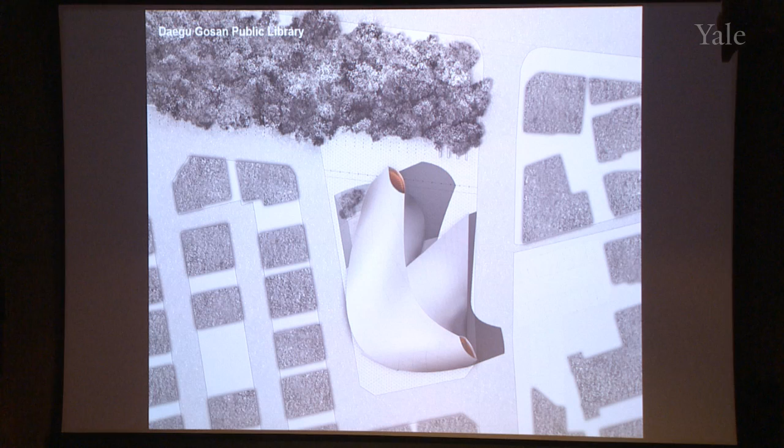Okay, last project. This was an ideas competition. One of the students here that was in my studio, Jackie Howe, was a member of our team working on this project. The idea was that we would take the forming system that we'd used for the rift and turn it into a structure. And so what you see is that each piece of wood is simply moved slightly in plane, and so you get this form.

So this is made entirely out of straight pieces. These are steel cones at the top, but all of these curved surfaces are made entirely of straight pieces. They are a remarkable structure because they are scabbed together with these joints, and they're made of regular modules of wood, so they're all made out of very conventional lengths, and they begin to act as a shell.

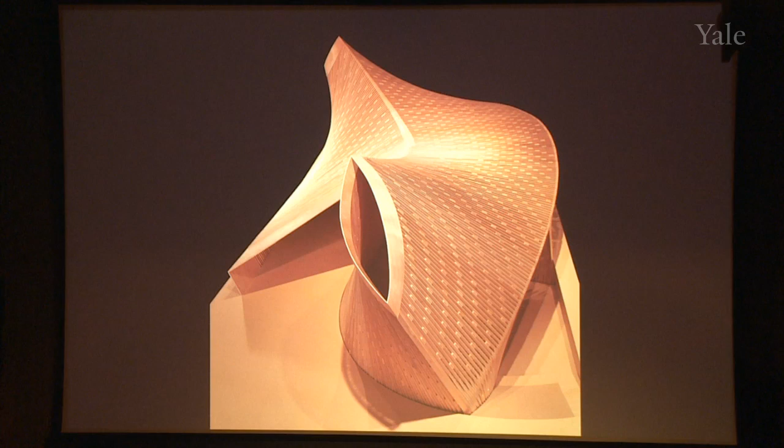And the key to this structure, unlike joists or beams where wood is limited in its span by virtue of its depth, here we're limited in span by virtue of the curvature of the overall shell. And so we begin to get some remarkable spans, really remarkable spans, and the ability to do some very interesting things which have a remarkably three-dimensional quality made entirely out of straight sections.

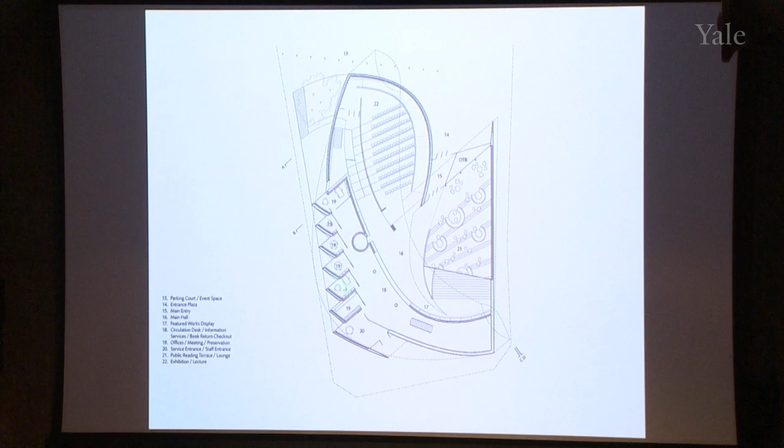And so here are the plans. It was a small branch library. So there's a reading terrace, an auditorium. This is the reception desk, some offices and back of house. The stacks above and a mezzanine above that. And this is the section through the building.

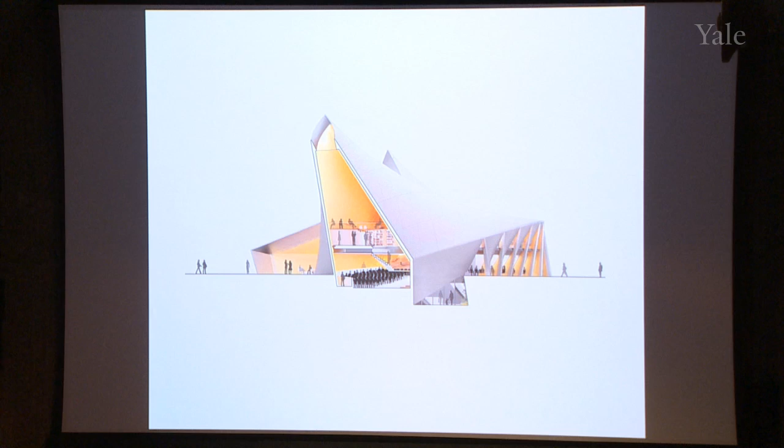And you'll note when you look at the sections that in one direction the sections are made entirely out of straight pieces. And that's because those sections are cut perpendicular or parallel to the members which make up these shapes. And so again, everything is straight. But as soon as you rotate 90 degrees and you make a cut through this form, you get these remarkable curvatures and curving planes, which come simply out of the function of the slight adjustment of adjacent members of wood.

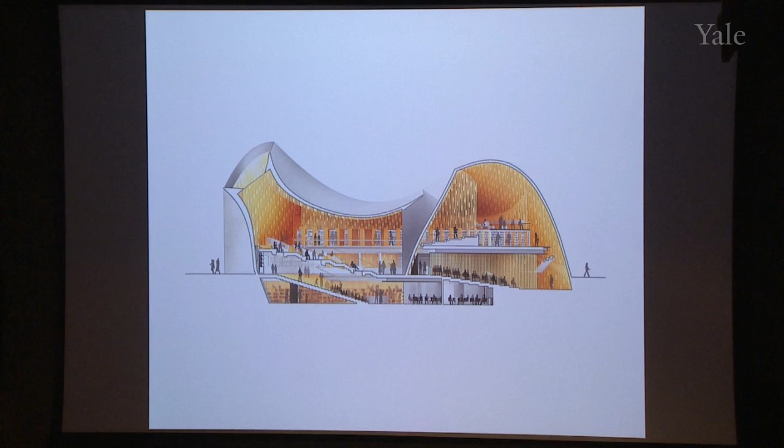And you can see that these shapes begin to become very significant structures. That is a very robust dome. And so we don't need beams that span from here to here because we have a shell. We have a shell that does that. And so you're able to do enormous structures using wood in a completely efficient way.

Another of these sections. Our projection for the exterior was cementitious coating and ceramic tile. In retrospect, I don't think that's the best solution for this material. I think a metal shingle is the most natural cladding system for it.

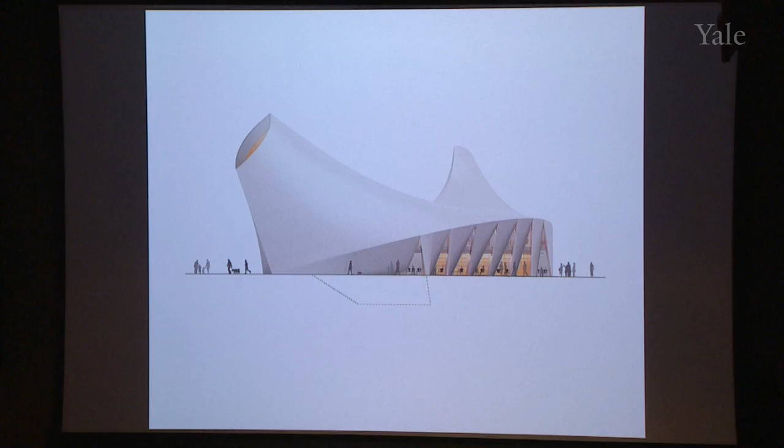Here you can even see that this system allows you to rotate planes out to construct gill-like openings from the interior to the exterior. And so some of the perspectives of the interior of this space, again, all of these are reciprocal structures made of small, short members, all tied together to function as a shell.